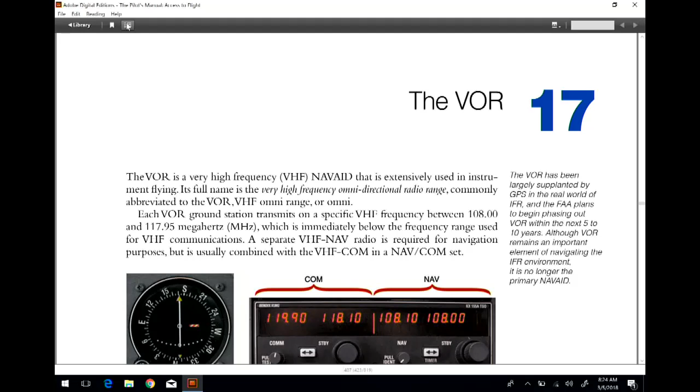In this case, it can give a little bit more precise guidance to or from the station. Let's take a peek at the VOR. I know you've all done the reading, and one of the things they tell you right up front in the margins is that the FAA plans to start shutting these things down.

The reason the FAA is shutting these down is because GPS is taking over everything. So you might think, why do I have to learn this if GPS is the way to go? Well, we found out in a previous chapter that GPS, even though it's 99.99% effective, is not foolproof. So you need other ways to navigate should you need to.

The way we use this here with VORs is like this. This is something you have on your airplane. This display represents the VOR receiver, the thing that receives the signal, and this gives you your display.

You'll notice this thing around here looks like a compass rose, kind of like a heading indicator. Then you have this bar in the center. This bar will go either left or right to indicate that you are left or right of course. The bar should be considered your course.

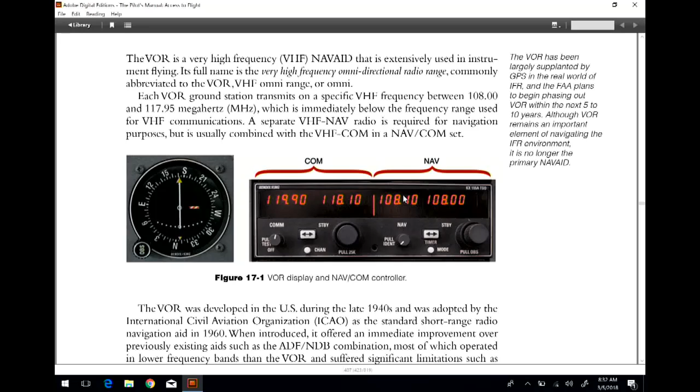The G1000 already has integrated inside this system two different ground-based radio navigation sources that you can choose. So if I want to dial something in, here's 108.0, and if that's the frequency I want, but now I want to make it active, I hit the little flip-flop switch here, and that moves it over to the inside, which now makes that active, okay?

My box tells me which of these numbers I'm going to manipulate. If I want to move my box back up to nav 1, I press this button here, just press the top of it, and that moves it up here to this side, okay? Communications work the same way. There's my communication knob over here. I set whatever communications I want here on my comm, and then to move it to active, I press the little flip-flop switch and that moves it over to active, okay?

So that's kind of how that part works. Now when we're looking at this, you'll notice this is your HSI, right? We call it an HSI because of what? This has some form of navigation in an overlay on top. In this case right now, it's showing GPS, and it's showing GPS en route somewhere. We're not sure where because it's not set up correctly here.

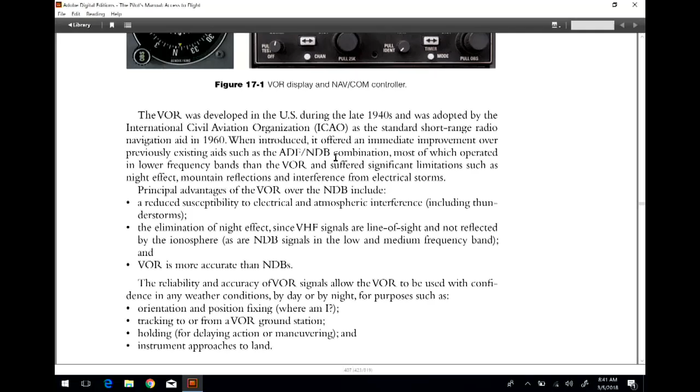An NDB is a non-directional beacon. It's just a lone radio station transmitting a signal in all directions. It transmits the same signal everywhere, going out just like you throw a rock in a pond and see those ripples move away from the impact zone. The radio waves do the same thing, spreading out in all directions from that radio station.

You had an ADF, an automatic direction finder, that in much the same way that this needle points here toward a particular course or station, this needle would point at that station. They would use that for homing in on it using a particular series of bearings to get to that station.

ADF, NDB. We don't teach that anymore, and thank goodness for it. Automatic direction finding is one of those things that has really gone away. There are still some non-directional beacons out there, and if you have an airplane with an automatic direction finding system, you can use it, but they haven't put ADF in airplanes for a long time. They've moved to VORs and GPS. So we don't even teach the NDB and ADF stuff anymore, and thank God for it.

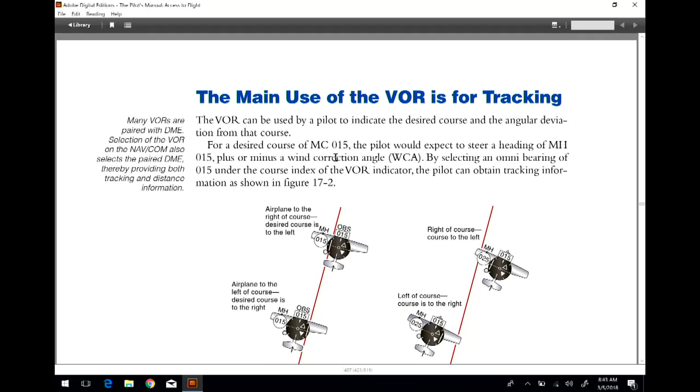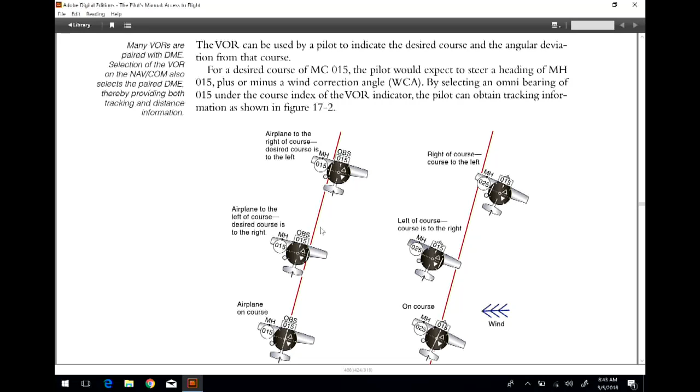This tells you about the main use of the VOR, and it's for tracking a course. This is kind of the course we're wanting to follow. This is how you put the airplane on course. You'll see the CDI indicator move off to one side. That's what these illustrations are showing you.

So this is the VOR here, and this is moving away from this VOR. You'll see that on the left side of this track, your CDI is to the right. That means your course, or this line, is to the right. To get back on course, you steer to the right to get on this line, which puts this line underneath the center of your VOR receiver.

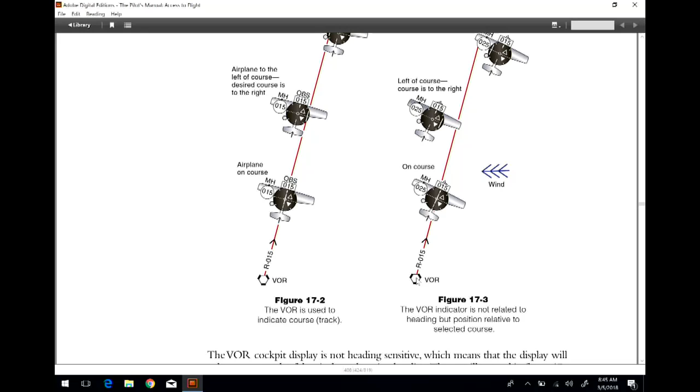Okay, this kind of shows you what I was talking about. But the one thing it doesn't tell you is how you find this line. How is this line identified? You'll see coming off this VOR these numbers. It'll say R-015. What that's telling you is that coming off this VOR is a radial emitted from the very center of this very high frequency omnidirectional range.

Remember your compass rose, that thing you memorized, engraved on your brain in numerals and letters of fire. How many degrees are there in that circle? 360 degrees. A VOR identifies each one of those degrees with something called a radial.

If you think about the spokes on a bicycle wheel, with the hub at the very center, that's your VOR. Those spokes go out to the rims to hold the rim in place so you can put a tire on and go someplace. Each one of those spokes can be thought of as a radial. There are 360 of them that emanate from the center of the VOR outward. 360 of them. Keep that in mind.

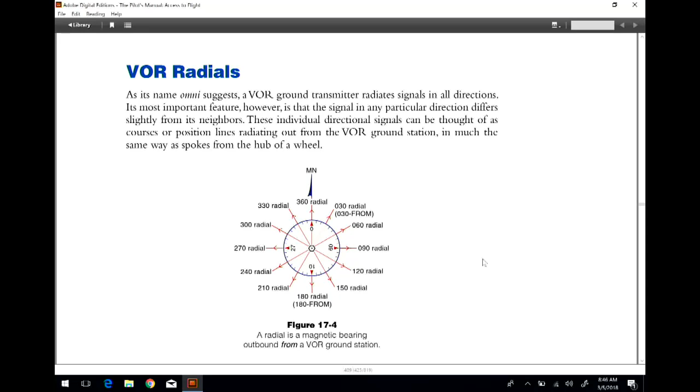And you can read this. Now we're going to talk about radials. Here's the part I want you to remember. As if there's only just that one part I want you to remember—yeah, you got to remember all of this. So what happens is this.

A VOR is set up magnetically; it sets up toward magnetic north. Now we know from our experience with the quizzes we've taken that the further west we get in the country, the more magnetic variation we'll have that favors an easterly turn of our compass, right? And on the east side of our great land, we'll have more of a westerly turn to our magnetic variation, right?

Here's what I want you to do: pull out your sectional map. Go ahead and pull out your sectional maps right now, one per table. Pull out that sectional map, and what I want you to notice on that sectional map...

Excuse me, guys, I apologize. Hang on here.

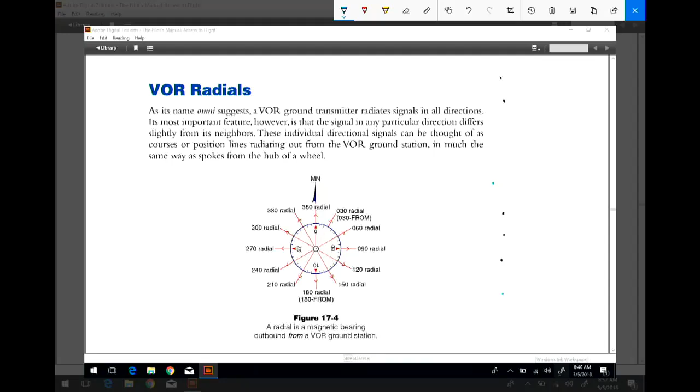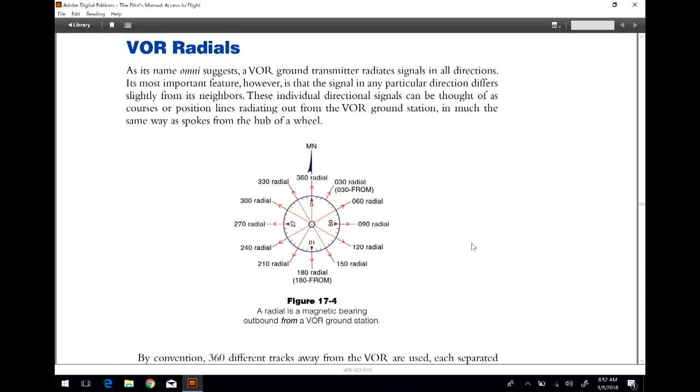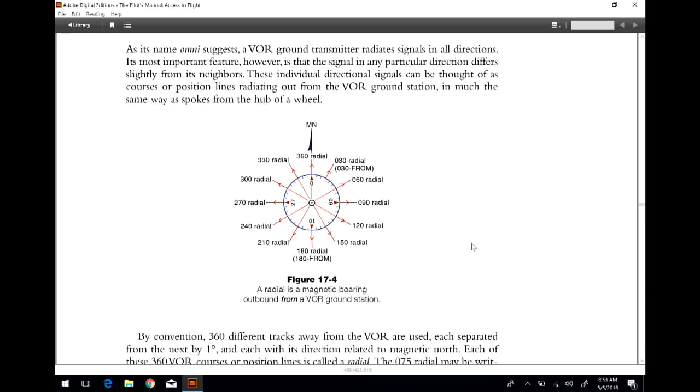But it gets a little more confusing than this, naturally. Let's take a look here and remember what I said. Emanating from this particular radio station, or this VOR, emanating from that right there, is you have 360 radials. Well, look at this. Let's say I am an airplane. Oh my Lord, wow, that's not a good airplane. Okay, there's an airplane. Let's say, for instance, I am east of this station, and what I want to do

is I want to fly west. If I'm flying west, I can fly to this station on this radial. But is this radial here the same radial as this radial here? No, it isn't. It's a straight line, but kiddos, there are two radials there. Where does the one radial stop and where does the other one begin? It begins when you cross that VOR, or it begins when you intersect that VOR.

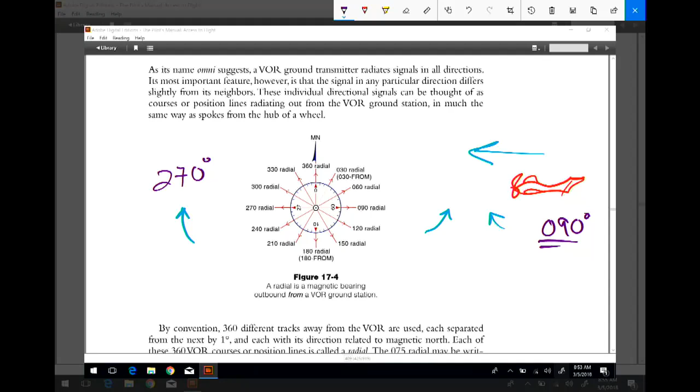Now that you have that firmly in hand, let's use our little scenario here. Guys, this line is not going to be straight, but I'm going to try to do it as best I can.

Let's say that my airplane is up here, and I am on this radial. You notice here that I'm tracking to this station on the 223 degree radial. But we know that I'm actually not on that radial, I am on this radial. But Mr. R, I'm tracking to this station with a number, but yet you're telling me I'm on another number?

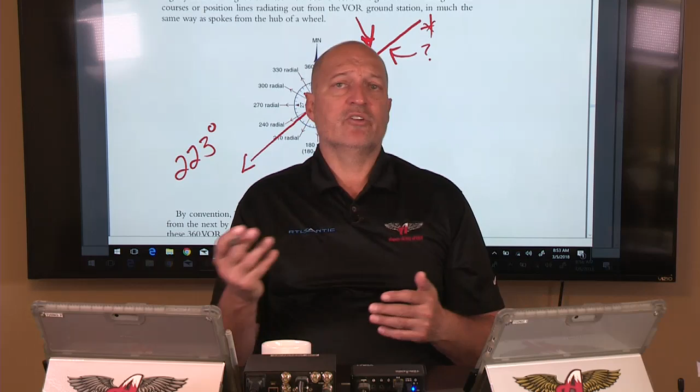Yep. What you're doing is you're on one spoke and you're moving to the outside rim of a different spoke, on that line. There are two different spokes. So here's how you have to think about using VORs and adjusting your OBS, your omni-bearing selector, or your course selector, to navigate to a station.

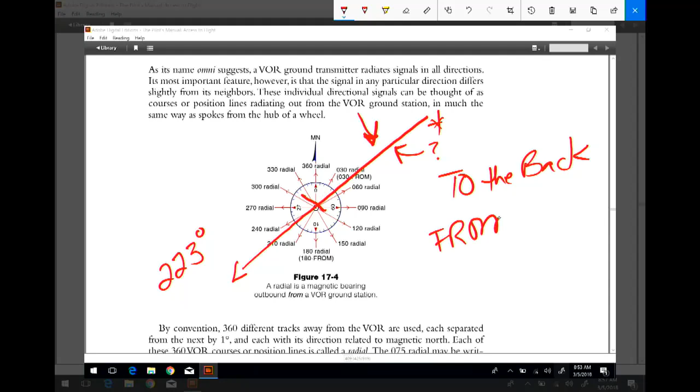Here's what you have to think: to the back, from the front. Write that down, memorize that. To the back, from the front. Write that down.

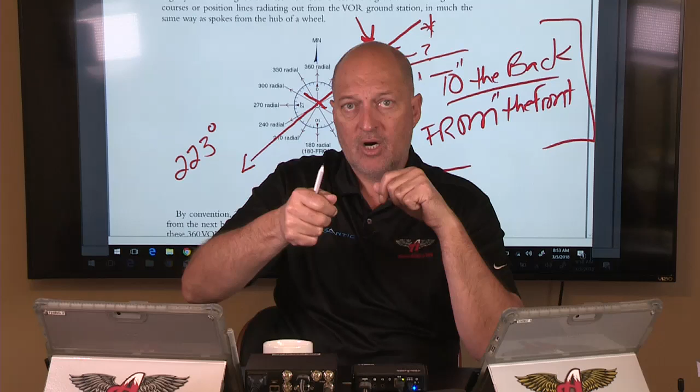Here's where it gets a little tricky. In order to navigate to a station, you choose a spoke or a radial on the back side of that VOR. You set a TO indication on your OBS or course selector to track to the back side of that VOR in normal VOR navigation - to the back.

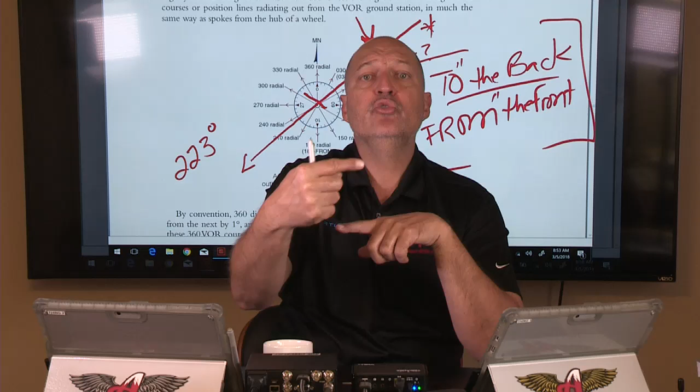So just like here, in order for me to track to this VOR that I know is down here somewhere, I am selecting something on this back side. My airplane is over here, and I'm flying this course to get me to the back side of that VOR, to pass through that VOR. That's what I'm trying to do.

Okay, I was on the wrong camera. This is my VOR tracking to the back. If my airplane is over here, and I'm looking at this as kind of like a plan view, I realize this is all kind of make-believe. But if I'm traveling this direction here to the back, this is what I'm doing.

So here, if this is where I am lined up on 223, and I have TO the back navigation, what radial am I actually on right here? If I'm flying this radial, what radial am I on? Well, I am on the reciprocal of the TO indication.

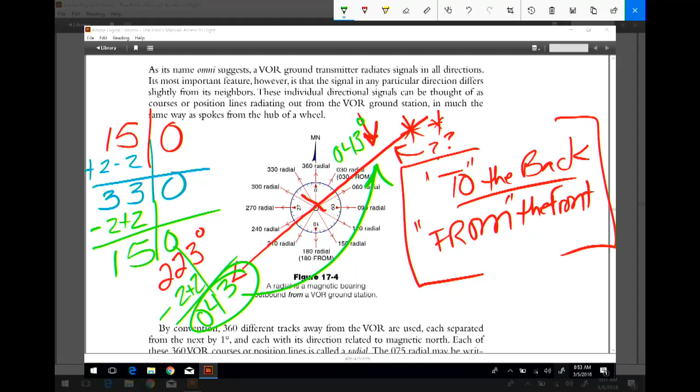043. I am on the 043 degree radial. Why does that matter?

Let's say that ATC calls you up and says '141 Hotel Lima, say current position.' Well, what you can do is tell ATC that you are on the Emporia VOR 043 degree radial at such and such DME, telling them what the distance is, because that range piece that we talked about allows you to determine distance.

So let's look at this. If I'm on VOR 1, dialed into Emporia, and this is where I want to turn, look right here in this box. Do you see this? That says 68.3 nautical miles away from Emporia. So I would tell ATC that I am on the EMP, the Emporia VOR 043 degree radial at 68 DME, heading southwest. Now it tells them exactly where you are.

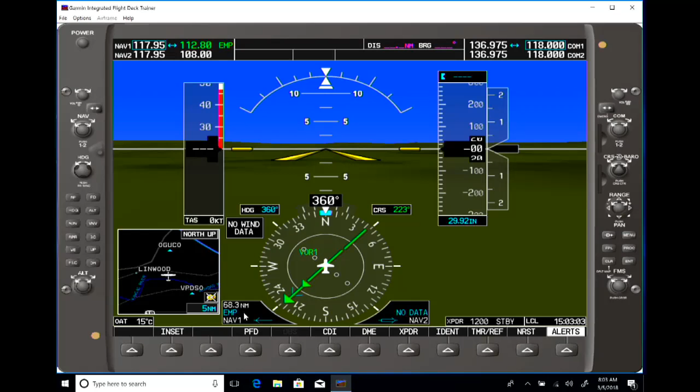You also want to know that because in our next episode, we're going to be looking at how we can use VORs to help us triangulate our position on a map from a pilotage standpoint. Pilotage, remember, that's that part where you're using a map to navigate. So we can look at where we are on these particular radials from different stations at a particular distance to determine our exact location if we need to. So that's what's coming next.

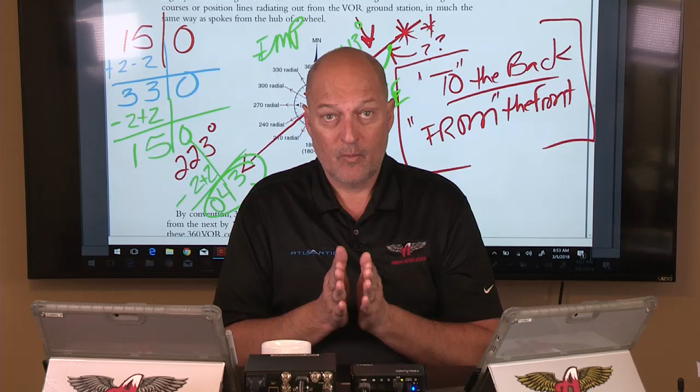Good so far? Yeah, I'll bet. Remember, you're probably going to want to watch this more than once, so just keep that in mind.

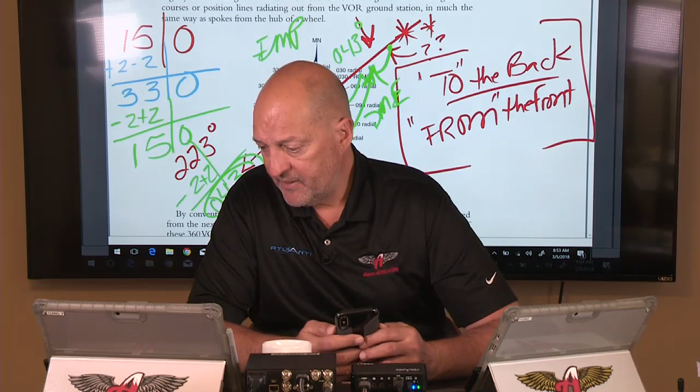All right, guys, I think we are ready to go here, and what we're doing now is we're doing the review of the quiz that you guys took.

Now, let me say something about the quiz. First of all, you had 8 problems on the quiz. That's not very many, the weight and balance problems. Second of all, you've done some of those before. Some of them should not have been new to you, because we worked some of those in class as well. The next thing is that we spent 2.5 weeks covering how to use both the graph and the table method of what we do.

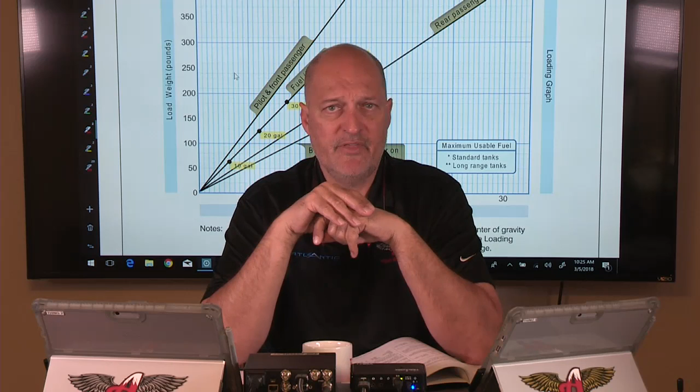And you've had videos to be able to go back and watch all of this stuff. So when I hear that there was a lack of effort on students' parts to even try to finish the quiz, I don't get that. I don't understand that at all. So, it's one thing to perhaps not have done the homework, not have watched the videos, not have paid attention, but it's something else entirely to give up.

Guys, if you start that now, if you start giving up now, you'll give up the rest of your lives. You can't do it. I'm not going to let you. You've got to try. You have to work it out. You've got to figure it out. You have all the materials. You have all of the videos. You have resources out the wazoo. To not try, that's pretty disappointing. So let's not let that happen again. Can we make that deal? Is that a fair thing to ask? I hope so.

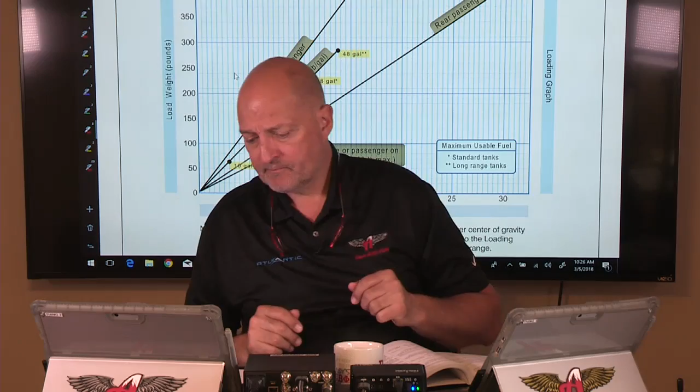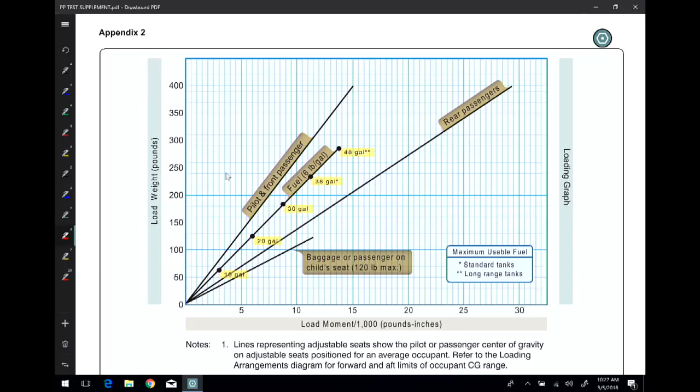Okay, I do have my spectacles here because I will be looking at some things that are kind of tiny to see. So the first one we look at, quiz question number 1. Refer to figure 34. Which figure is that? Well, is it this one? Is it the graph? Oh, look right there, figure 34. Excellent. What do we remember about this particular figure? Well, first of all, we have a moment here.

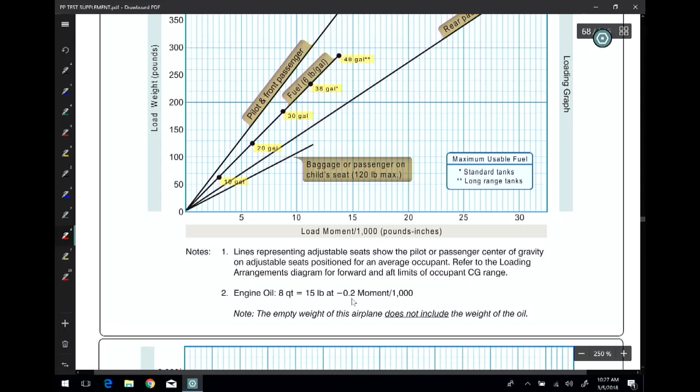Our index is 1,000, so we have a moment index with 1,000. Next, we have an oil issue here. So remember, 8 quarts of oil, that's 2 gallons, is 15 pounds, and it gives us a moment here of negative 0.2. The empty weight of this aircraft does not include the weight of the oil. So remember, you've got to add that in.

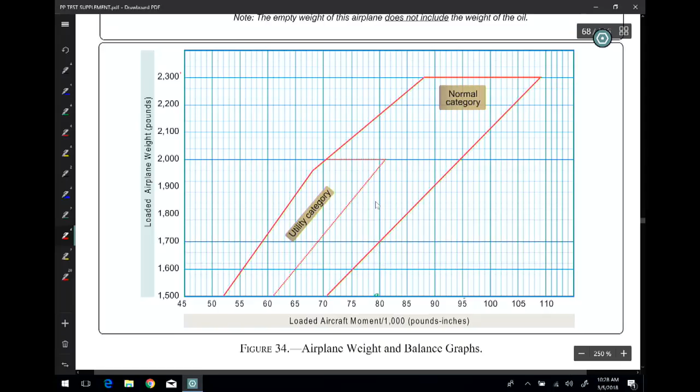Then we have, basically, our loading envelope here of this airplane. We know that the max weight of this airplane is going to be 2,300 pounds because that's where everything stops right here. We also have 2 different categories: a utility category when the airplane is loaded lightly, and a normal category for basically everything else. Along the left edge vertically, you have all of your weight. Then from left to right is where you have your moment. So remember, the way we use this graph is we find the weight of whatever item it's going to be. In this case, let's call it the pilot and front passenger. Let's say it's 300 pounds.

You find 300, you come across the line here horizontally until you intersect with the angle here that represents the arm. And then from here you come straight down using your plotter to draw a nice straight line, and then you find your load moment here.

So if we look there, we know that there's 10, 11, that looks like 11.5, because two of these little lines equals one complete number. So here's 10.5, 11, 11.5, yada yada yada, all along here.

The next thing to remember is that you have two different fuel capacities. One is the standard tanks, two is the long-range tanks. One asterisk here is going to be the standard tanks, two asterisks here is going to be the long-range tanks, which has 10 gallons more of fuel. So that's kind of what we have here.

And there are really only four things that you're working with: front seat, fuel, back seat, baggage, or a passenger here in the child seat, whatever that's going to be, with those limits. So that's the airplane that we're working on.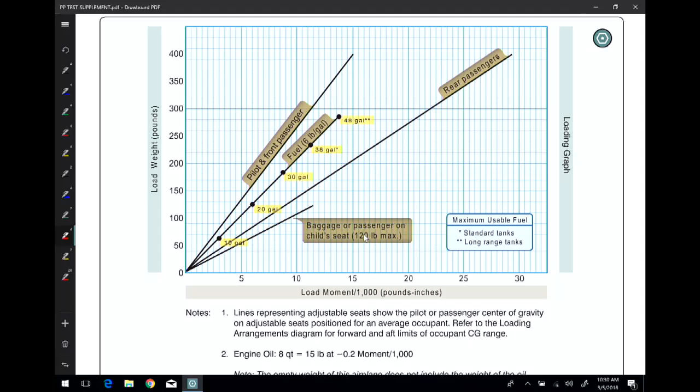So if we look at this, the very first thing that you're going to do before you start anything is your table. So this is what you're going to use to start everything out with, correct? Now let's read the problem together: calculate the moment, and determine which category is applicable. So what we're solving for here is the moment of the aircraft and which category it's going to be. Let's take a look at what they give us.

They give us the empty weight. So the empty weight, of course, that's what you're going to put here on your top line. So there's your empty weight. And you guys, you can fill this out. I'm sure you've done this.

So if you look there at your empty weight, I'm reading here, you've got 1,350 pounds. You've got it also in the front seat, 310, rear seat, 96, fuel, 38 gallons. How much is fuel? 38 gallons. Let me go back over here to this question.

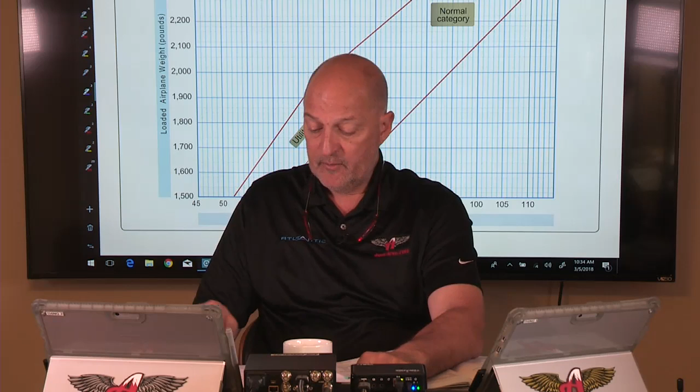Okay, then we look down here. So we have 1,350 in the empty weight, front seat 340, rear seat 310, baggage 45. And then we have oil, 8 quarts — got to add 15 pounds to that, right? Okay, so we look at that, and what do you get when you add all of that up?

So you add everything up, that is the known, because what we're solving for is the maximum amount of fuel that we can put on this airplane if it's loaded as follows. Guys, this is a real world example of the calculations you're going to do in airplanes, because you got to know, if I plan on putting this many people in this airplane, how much fuel can I carry. This is real world stuff.

So we look at that. You should have gotten 2,060. Let me double check that and make sure. Give me just a second. 2,060, yes. 2,060 pounds is what you should have gotten there with that addition of your weight column.

Now, what's the max takeoff weight of this airplane? 2,300 pounds. So what's the difference between 2,300 pounds and what you have right now of 2,060? So you take 2,300, subtract 2,060, what do you get? You get a range here of 240 pounds to play with. So you can play with 240 pounds.

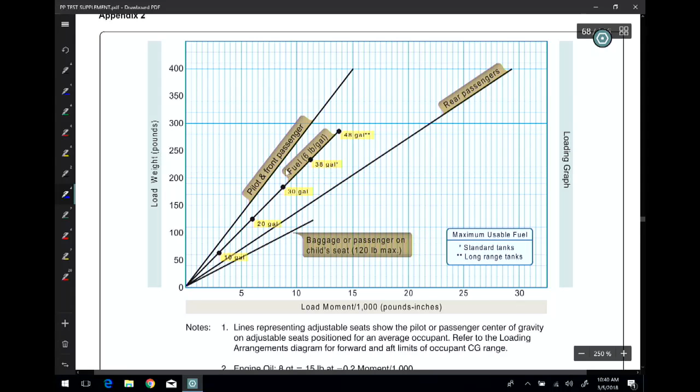I think we have one more on the graph. Question number 4, determine the moment with the following data. So again, we have the empty weight, 1,350, front seat, 340, fuel, standard tanks capacity. So you got to know what the standard tanks are. So when you look at that, remember, you got to come over here. Here's your standard tanks right there, that asterisk, 38 gallons, right? That's standard.

So when we look at that, let me find the question again, 35, 30. So we have 38 gallons. So that's 228 pounds, 228 pounds for fuel. Oil is 15 pounds. So what do we get here for our weight? Our total weight of this one, let me find this here, guys.

Let me look. Question number 3672. No, 3672. Where is it? Where is it? Where is it?

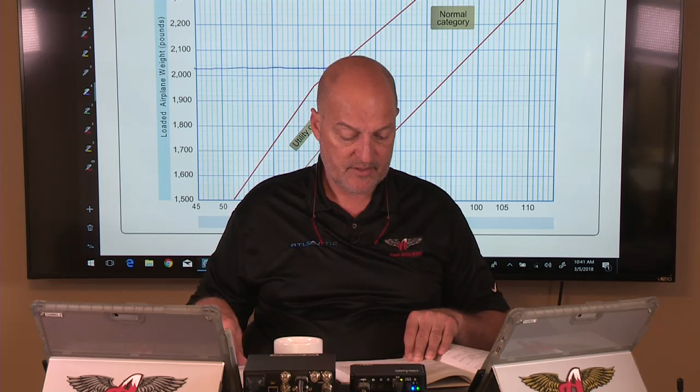So 1350, 340, 228, 15, that's going to be 1,933, right? 1,933 is the weight. And then for the moment, 51.5, which is given.

12.6 for the front seat. Fuel, 11.0. Oil, minus 0.2, gives us a moment of 74.9.

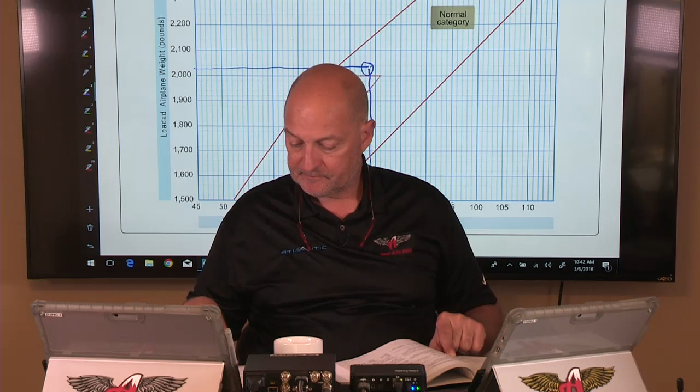That is what I got right here, 74.9. Determine the moment with the following data, and that's what we got, is a moment of 74.9. And also, just know it didn't ask for this, but if we looked at this, 1933, here's 1933 coming across here. We said our moment was 74.9.

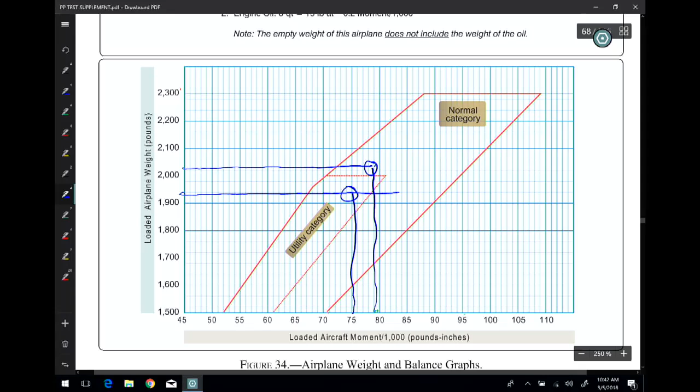Let's call it 75. That puts it right there inside the utility category, just to kind of finish things off there. So that's how we do that.

So those were the 4 that were part of the graph part. Now the next part is the table. The table is the easy part, because when you look at the table, remember the table that you draw here? This is your table. Well, when you look at the table of the other ones here, this is, you basically, all you're doing is you're transferring data from one table to the next. So here's the table that you're using here, because remember, weight times arm equals moment.

And we have an index here now of moment divided by 100. So the index is 100. So we take whatever the weight is at whatever station that we're talking about here. Remember, these are stations. The weight times the arm equals the moment.

So we actually are able now to work with the real numbers, which this is great. Now we don't have to really decide, you know, how straight of a line can I draw? So we're looking at this. So let's take a look at the first one.

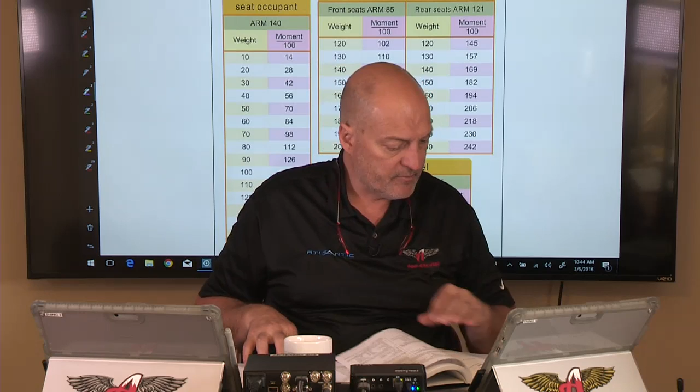The first one that we're looking at here, 3655. These are just my internal numbers. Let me go back to this. 3655, is that right? Yes, 3655. So refer to figures 32 and 33. That's the table, 32 and 33.

Determine if the airplane weight and balance is within limits. Weight and balance, are they within limits? Isn't that why we're here? Yeah. So let's look at this.

So what was given is the front seat, which is the weight of 340, rear seat weight 295, fuel in the mains 44 gallons, right? And then the baggage of 56 pounds. That's what we're working with.

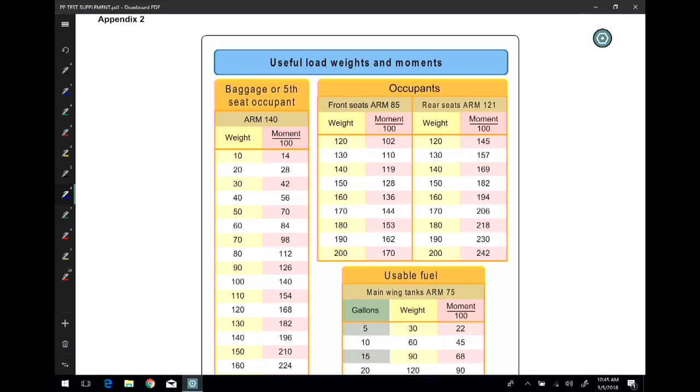Well, what's missing? Well, the very first thing should be the weight of the airplane, right? So remember where we find that. The weight of the airplane is given right here. This is where it tells us what the empty weight of the airplane is. It also tells us what the moment of that airplane is. We don't need the arm because it gave us the moment.

Also, take a look here. The oil, it's included in the basic empty weight of this particular problem, so we don't have to factor in the oil on this one. And this gives us the outline of where we're going to be at what? Our max takeoff right here, 2950. That's what establishes our max takeoff weight, 2,950 pounds. Okay? All of that information is given to us right here.

Right? So when we look here, let me go back to this. Let's look at the, because remember, you got to get this drawn. So check this out. Make sure that that's on there. And then we're going to look here. Give me just a second.

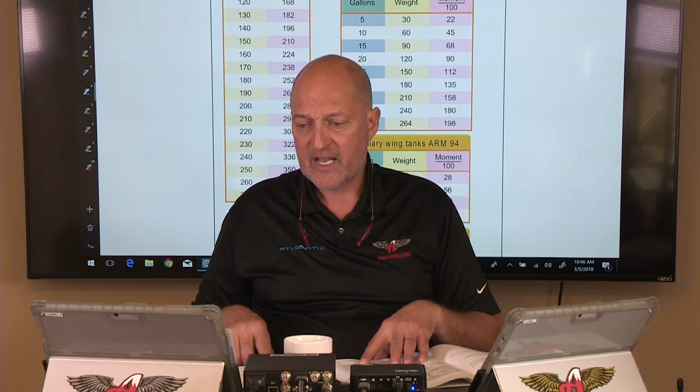5 with the weight here. So with the weight, we should have gotten 2,015 pounds for the airplane, 340 for the front seat, 295 for the rear seat, 44 gallons times 6 is 264 pounds, baggage 56 pounds. We should have gotten 2,970 pounds. Ding, ding, ding, ding, ding, ding, ding, ding, ding.

What do we know right here?

That's our max, so we know right up front we have a problem. The problem is we're 20 pounds overweight. Okay, we're 20 pounds over. So we know that right up front. But what about the moment? Do we still have a balance in here? Well, in order for us to look at that...

We'll come down here and we're going to be looking at this. So when we add the moment of everything here, you have the moment of the airplane, the basic empty weight of 1,554.0. That again is given because it was given in the first part of the problem.

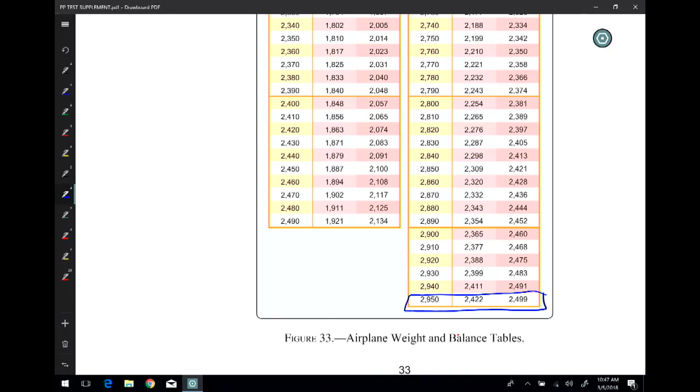Front seat, 340. So here we have, I'm going to change the color of this. Front seat, 340. Now we notice here that the front seat stops at 200 pounds in the front seat, but we don't care because we know the weight here is 340 times the arm of 85, and that equals 289.

You also remember you divide this by 100, right? And that's going to give you 289.0. 289.0 is the moment. Now, what about the rear seats?

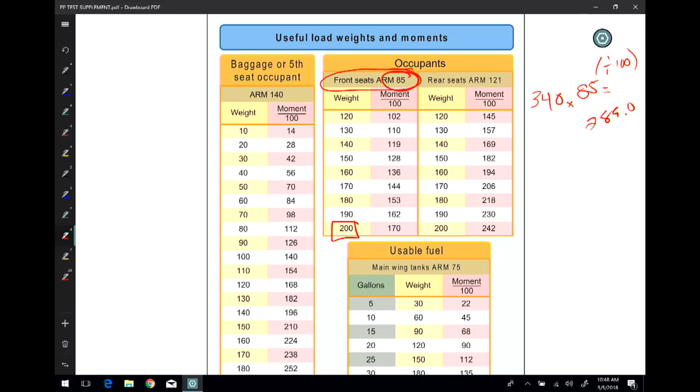Well, let's take a look at the rear. There's the arm of 121. The rear seat is 295. So we have 295 times 121, divided by 100. That gives us 357.0. See how we're doing this here? So there's that, 357.0. Fuel, 264 pounds times 75 divided by 100 gives us 198.0.

This is your moment column. Baggage, 56 times 140, divided by 100, gives us 78.4. So if you look at this column, 1554.0 plus 289.0 plus 357.0 plus 198.0 plus 78.4 gives us a moment of, let me get down here, 2,476.4.

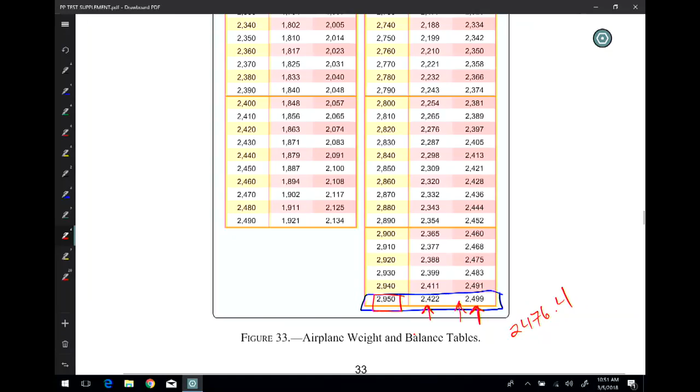Remember, this one is so easy to work with. Of all the figures for weight and balance, this one is the easiest because it gives you everything you need to know. Then you take the information from here, weight times arm equals moment, and you simply add it into your column where you have weight times arm equals moment. Then it's just addition, adding the weight to your total weight, adding the moment all the way down to your total moment. Guys, that's it. If you keep your accounting in order, this really is pretty straightforward. If this were really, really hard, I probably couldn't do it. So this is how we work it.

Let's look at the next one. Refer to figures 32 and 33 - by the way, that's going to be the table again. What is the maximum amount of baggage that can be carried when the airplane is loaded as follows? That's the part you circle - this is what we're solving for: the maximum amount of baggage that can be carried when the airplane is loaded as follows. So let's look at the loading of the airplane.

Front seat, 387. Remember, you're adding all of this to your table. Front seat of 387, rear seat of 293, fuel of 35 gallons - fuel of 35 gallons, okay? And 35 gallons, we know 35 times 6 is 210 pounds. So you add that in.

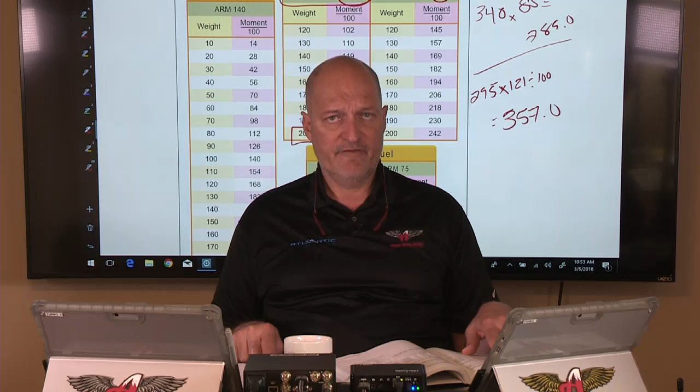So when you add the weights of your airplane, which is 2,015 pounds, remember front seat 387, rear seat 293, fuel 210, you should get a total weight of 2,905 pounds. Now let me ask you a question: what's your max takeoff weight on this airplane? 2,950 pounds, right? 2,950 minus 2,905 gives you what to play with there? 45 pounds, right? That's the difference between 2,950 and 2,905.

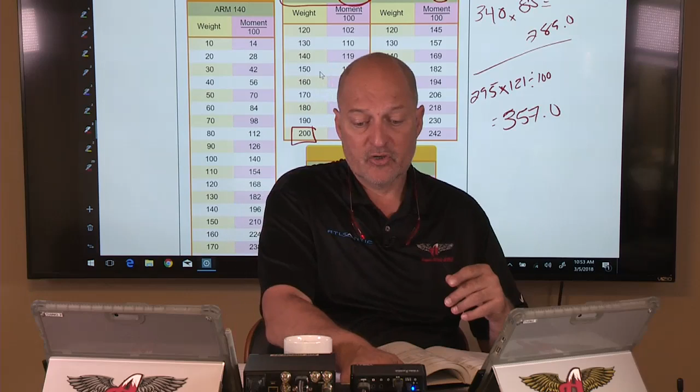Let's see if that works. So what you do is add that 45 into a column here for your baggage. Check your tools here, because here's your baggage, there's your arm. 45 times 140, divided by 100, is going to give you a moment of 63.0.

So now you add that to your total moment column. With your total moment, you got 1554 for the airplane, 329.0 for the front seat, 354.5 for the rear seat, 157.5 for the fuel, and 63 for the baggage now, and that should give you a total moment of 2,458. So you have 2,950 pounds now by adding that 45 pounds of baggage, and you have the moment here of 2,458. So does that compute? Let's find out.

2,950, check, that works. I need to be between the 2,422 and 2,499. It shows that I'm right here at 2,458. Yep, I'm in there. So with this, 45 pounds works, the moment works. I can add 45 pounds of baggage to this airplane, given all the other information that I have, and still fly it.

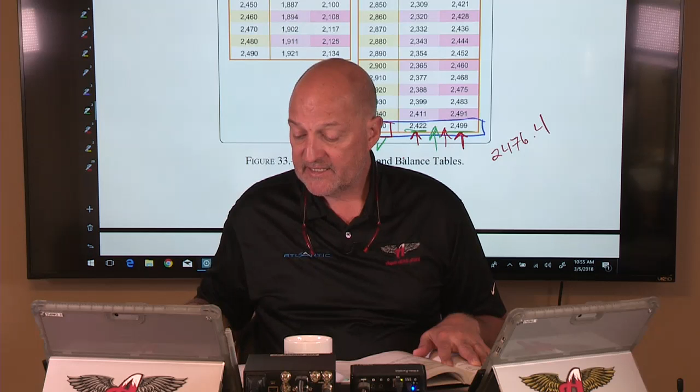That's that problem. Okay, so let's look at the next one. So on the next one, 367, this is this one here. Refer to figures 32 and 33. Calculate the weight and balance and determine if the CG and the weight of the airplane are within limits. So is my airplane within weight limits? Is my CG within limits? We got to figure that out.

So we look at this again. You start here, and you always know that with this particular airplane on this particular figure of 32 and 33, your airplane weighs 2,015 pounds and you have a moment of 1,554 with the index. So you put all of that stuff here. Front seat 350, rear seat 325, baggage 27, fuel, you've got 35 gallons. 35 times 6 is 210, right? So we look at that.

That gives you a weight in your weight column here of 2,927 pounds. So what do we know about that? Well, it looks like it's 23 pounds to the good. So it's within, by 23 pounds, our max weight of 2,950. Right? So we're good so far.

Then we look at this and we say, okay, what about the CG? So we look at the moment column. On the moment column, what you should put over there under the moment column: 1554 for the airplane, 297.5 for the front seat, 393.3 for the rear, 37.8 for the baggage, 157.5 for the fuel. That gives us a total of 2,440.1 for the moment, okay?

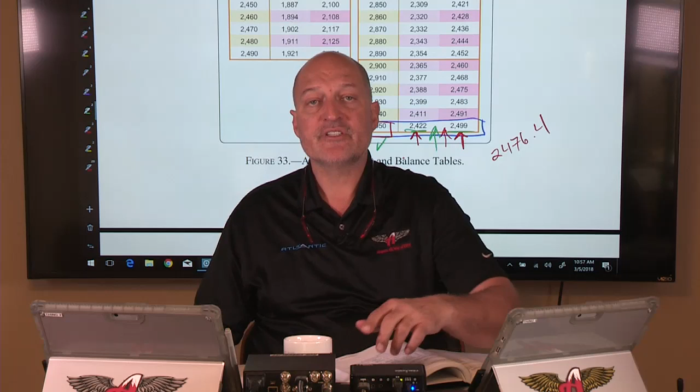But now it's asking us for the CG. Remember what we have to have for the CG. So to get our CG, we need to have total moment divided by total weight. So our total moment we said was 2440.1. Well, if you do all of the numbers out here like this, that's going to be 244,010 divided by 2927, our weight. That's our moment.

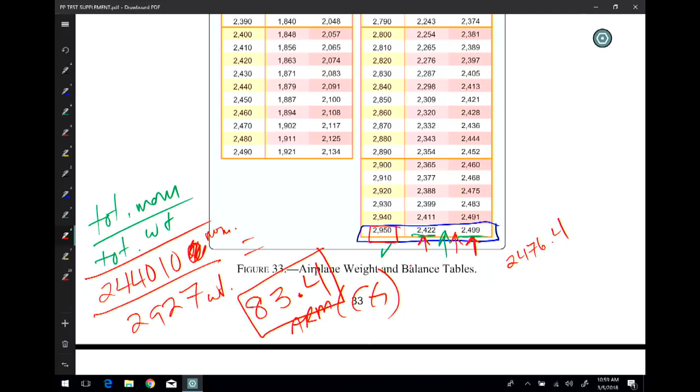So what does that mean? Well, if I look here at figure 33 here at the bottom, it's just giving me the moment side of things. I need to know about the CG. I wonder where I can find that. Oh, would you look at this? CG, right there. Okay, so with this weight of 2,927 pounds, we have our CG here.

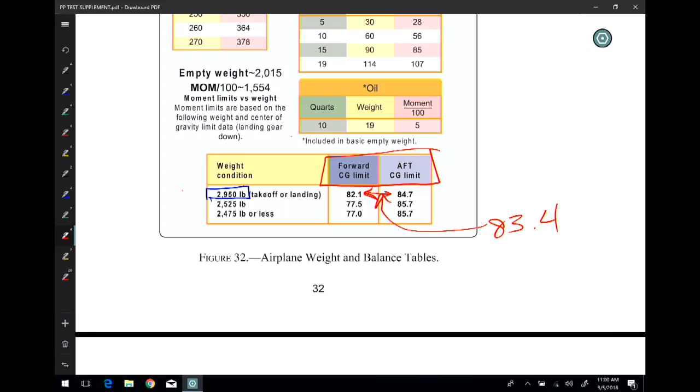83.4. Is that between these limits? Yes, it is. It fits right there. So the weight is okay at 2927, and our CG is good at 83.4. And the way that they will describe that is they'll say it's 83.4 inches aft, AFT, of datum. So wherever your datum plane is over here, adding it over here to this side, or actually coming this way to the airplane, that's what we're looking at. So 83.4 inches aft of datum, and we have seen here that this does work.

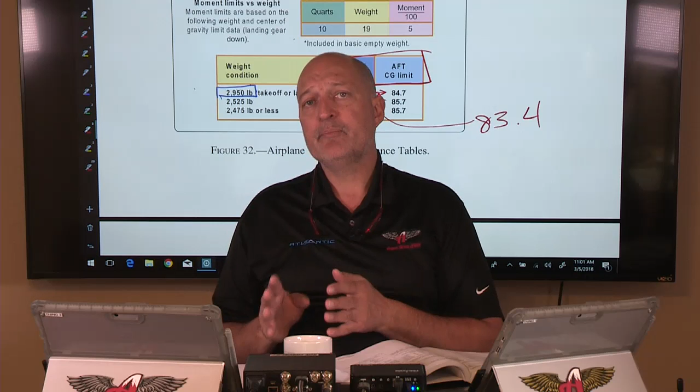Okay, there's that one. Last one. So the last one here is, refer to figure 32 and 33. Which action can adjust the airplane's weight to maximum gross weight and the CG within limits for takeoff? I wanted you to show your work on all of these, but specifically on this one. And the reason being is because I gave you on this what the FAA options are for you to do this problem. The reason I put this on here with the options is because it made it a little bit easier for you to do this problem, okay?

So, if we look at it, let's look at this again. You have the front seat 425, rear seat 300. Again, guys, you're putting all of this stuff in here. Fuel on your mains, 44 gallons. So if you look at this, let me turn here.

So the weight of the airplane, you can put this in here. The empty weight of the airplane is 2,015. Front seat, 425. Rear seat, 300. Fuel, 44 gallons times 6 is going to be 264, correct? 264. And that leaves a total of 3,004 pounds. So our weight right there is 3,004 pounds.

What can be the max takeoff weight of our airplane? 2,950. We're at 3,004 pounds. We're over, right? By how much?

54 pounds, right? You're 54 pounds over. That's the difference. 3,004 pounds minus 2,950 pounds gives you a difference of 54 pounds. So you're 54 pounds overweight. So what do you do to get the airplane where you can fly it within weight and balance limitations? Somehow you've got to get rid of 54 pounds.

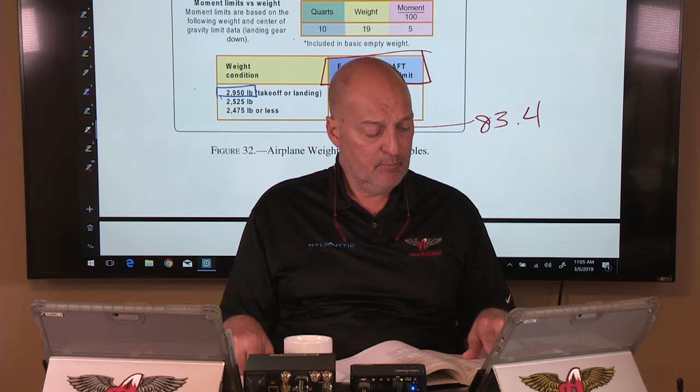So if you do that, you also have to calculate what moment that is. If you look at this and you've done the moment on all the problems before, you'll see the moment here of 1554, that's the airplane. 361.3 for the front seat, 363.0 for the rear. The fuel you had on there, 44 gallons to start with, that's 198.0, and that gives you a total moment of 2476.3. But we know the weight is 54 pounds over.

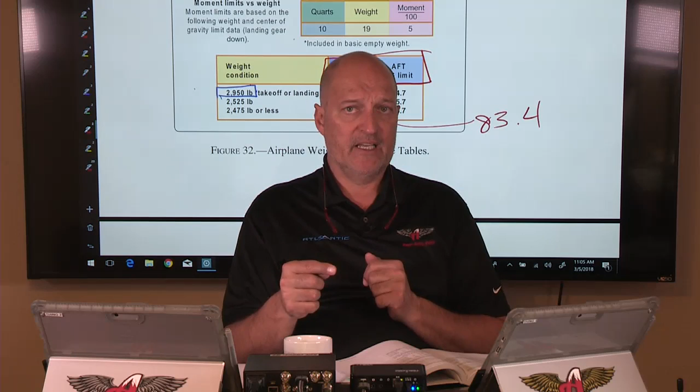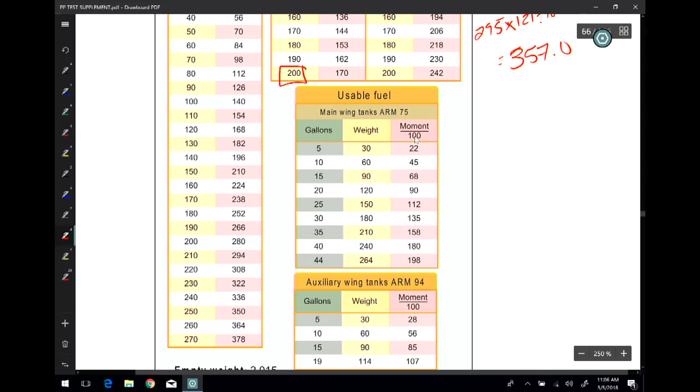So we have to make an adjustment to that fuel line. To do that, we take 35 gallons instead of 44 gallons, and look at what the moment is there. You can do it that way and subtract the difference, or you can look and say, okay, what's the moment of 9 gallons of fuel? You can do that because you can look right here and say, if it's main, 9 gallons of fuel, 54 times 75 divided by 100 is 40.5. So you can take 40.5 off your moment column, which is that moment for that fuel. Subtract 40.5 from that.

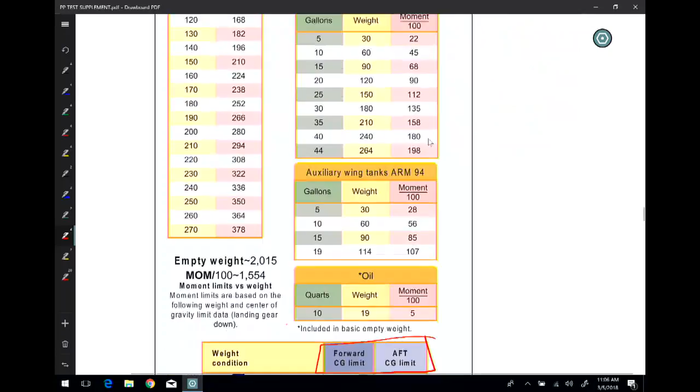That gives you 2435.8. So if you look at 2435.8, does that work for us? Yep, falls within this line right there. So we subtracted 9 gallons of fuel to give us 35 gallons of fuel, and with that adjustment, that still puts us within the fore and aft CG range of our moment. We are good to go.

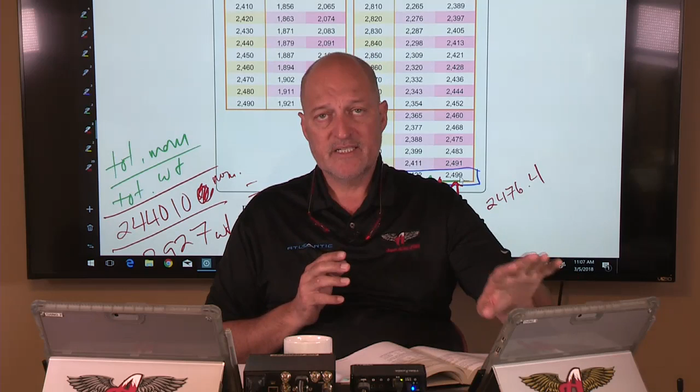There it is. Once you get the hang of it, it is basic addition, subtraction, multiplication, and division. Guys, it's 4th and 5th grade stuff right here. The key to everything is organizing your work. If you are trying to do this in some other way than using this particular table to keep your accounting in order, it doesn't matter what your conceptual basis of everything is, you're going to screw the numbers up. So keep your numbers clean. Using this table method versus the graph method, that is by far my favorite way to do things. But you've got to know how to do both. So that's where we are, okay?

So that ends that. Now, if you are not happy with your quiz, oops, hang on.

Wow. Yes, my son is trying to contact me here.

Ask yourself why. Why were you not happy with the outcome of your quiz? Was it effort? Was it a lack of understanding? Why was it a lack of understanding? Did the effort tie into your lack of understanding?

All of these classes are recorded, guys. You can always go back and re-watch a class. That's the benefit of what we do here, so you can look at it if you're confused. You also have the books, so you can read them and understand this.

Then you can always send me a text, you can always send me an email. It's great if you want to come find me and ask me for help. That's awesome.

But I'm not doing the work for you. You've got to show me your effort. That's what you have to show me. If you show me your effort and you still can't get it, I'll crawl through broken glass to get you to the finish line. But if you just come in expecting me to do it for you, that's not going to work for either one of us.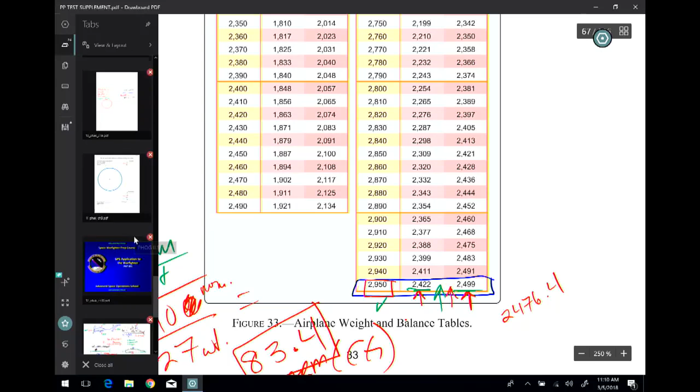And with that, I am going to switch this over here to this. Hang on here for me, gentlemen. Let me get down here. I think this is it. Yeah, would you look at that?

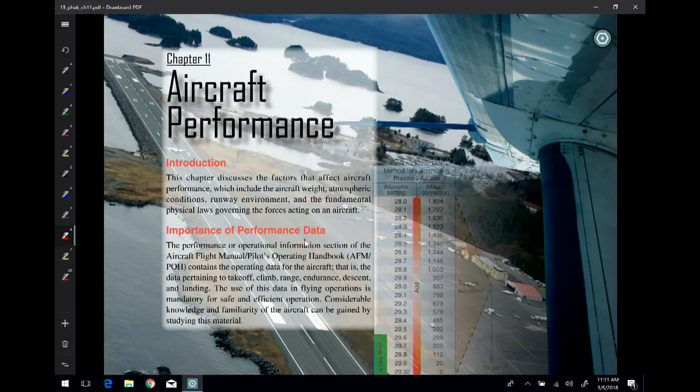Aircraft performance. So, chapter 11. This is what I want you guys to start reading, chapter 11, okay? Chapter 11 is going to start working us through aircraft performance. So let's just take a peek here at what we're doing. Some of this stuff is going to be a reminder of things we have done before.

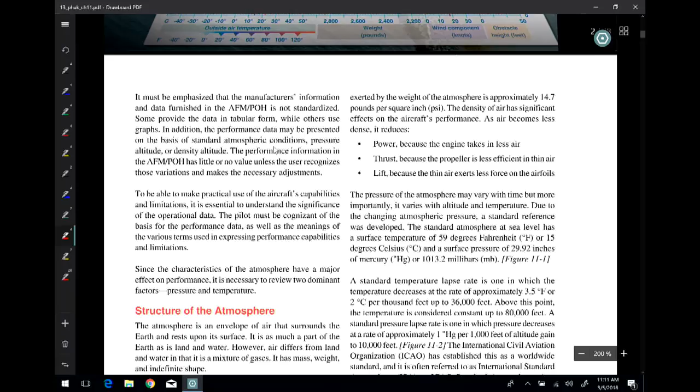First of all, notice that your performance section is going to be noted in your AFM and your POH. You found that out when you did the paperwork portion of the chapter, whichever chapter that was. Notice the review here of our atmosphere. This is something that is huge.

Remember the makeup of our air: 78% nitrogen, 21% oxygen, 0.9% argon, 0.1% everything else. That makes up our air. 78% nitrogen, 21% oxygen, 0.9% argon, and 0.1% pick a molecule, okay? Everything else. That is the air, that's the percentages of the air available to us, okay?

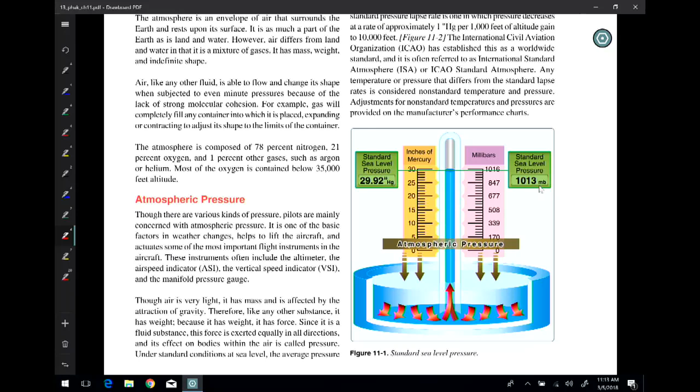So, right? Then also remember, we have to start measuring somewhere. Sea level is always a pretty good place to start. So to find what we call an international standard atmosphere, someplace where we can begin our measurements, we will begin at sea level. We will begin at 29.92 inches of mercury, and that comes out to a millibar equivalent of 1013.2, on a standard temperature day, which is 59 degrees Fahrenheit or 15 degrees Celsius. You writing that down?

That is international standard atmosphere. Also remember this: for every 1,000 feet of altitude we gain, we lose approximately an inch of pressure, 1 inch of mercury. And during a standard lapse rate, we lose 2 degrees Celsius per 1,000 feet.

So if we look at 8,000 feet, roughly about where Aspen is, we can see that we have actually a pressure on a standard day of 22.22, but our standard temperature for that altitude is going to be almost minus 1 degree Celsius. So a standard day for us is going to be minus 1 degree Celsius, giving us an approximate pressure, an actual pressure, of 22.22 inches of mercury. Now, why is that important?

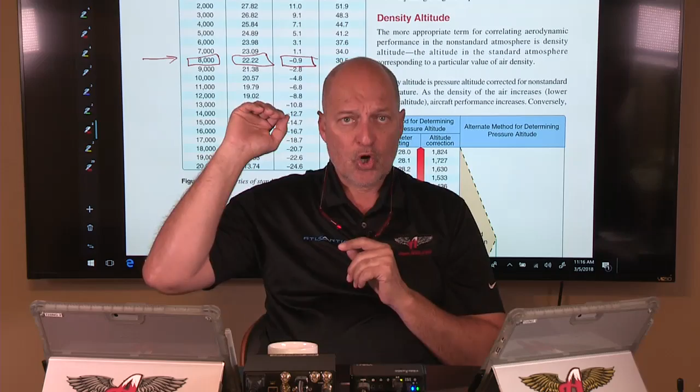Because when it gets warmer, what happens to those molecules? They spread out even further. Remember, you have to have X number of molecules flowing over that wing to get it and keep it in the air. That means your airplane at altitude has to work harder to generate that same type of molecular flow when those molecules are all spread out.

It has to work harder than it does at sea level, where all the molecules live. That is where the molecules are most dense, and that's where aircraft performance is the greatest. So changing altitude and changing temperature will have a negative effect on the performance of our aircraft.

How much? What will it allow us to do? What will it not let us do? That's the whole point of this chapter: to find out what you can do, and probably more importantly, what you can't do, given current altitude and temperature settings.

You also have to account for your fuel flow. It's the one area where we actually kind of gain something from altitude, because we don't have as many molecules that can get sucked into our engine. Remember, you have to have three things to keep an engine running: air, fuel, and spark.

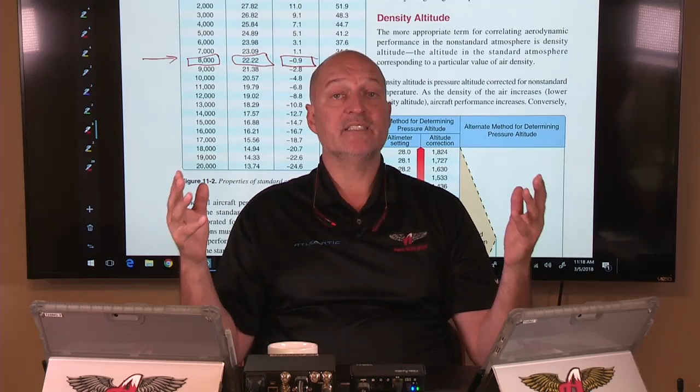When the air becomes less dense and the molecules coming in are fewer and further between, you have fewer oxygen molecules available, even though the percentage is the same—there's just not enough molecules. So when you have fewer oxygen molecules available for combustion, you have to start reducing the amount of fuel you allow into the engine. Remember that on these systems? So you can actually run leaner up here and use less fuel. That's one area where we actually gain something.